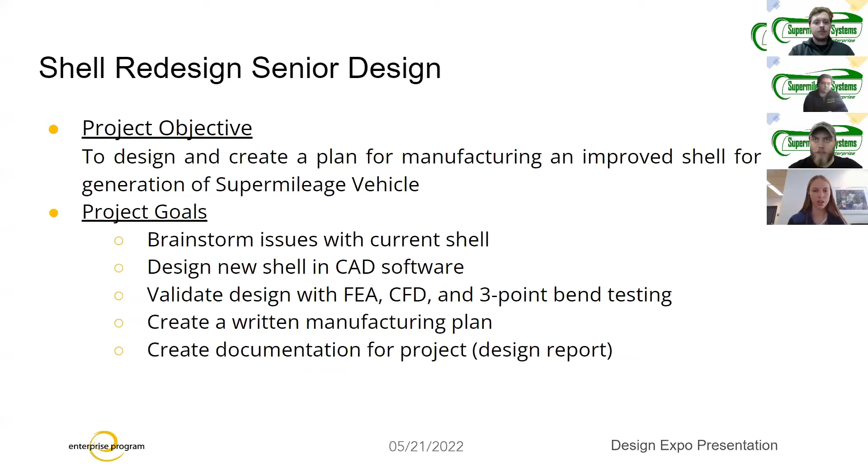We also plan to validate this with finite element analysis, computational fluid dynamics, and physical material testing, as well as create a written manufacturing plan and documentation for the project, mainly a design report.

We have some team-defined requirements for this. The new shell needs to be more lightweight than the existing shell and also have an improved aerodynamic profile. It needs to fit a 5'6" tall driver, have better seams on joined shell pieces, have a more horizontal driver position, and have better testing done, mainly FEA on the floor pan of the car, to ensure minimal deflection.

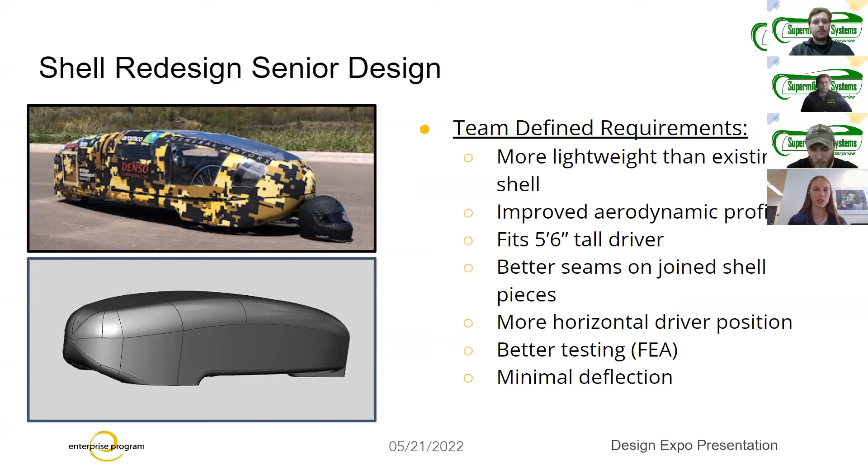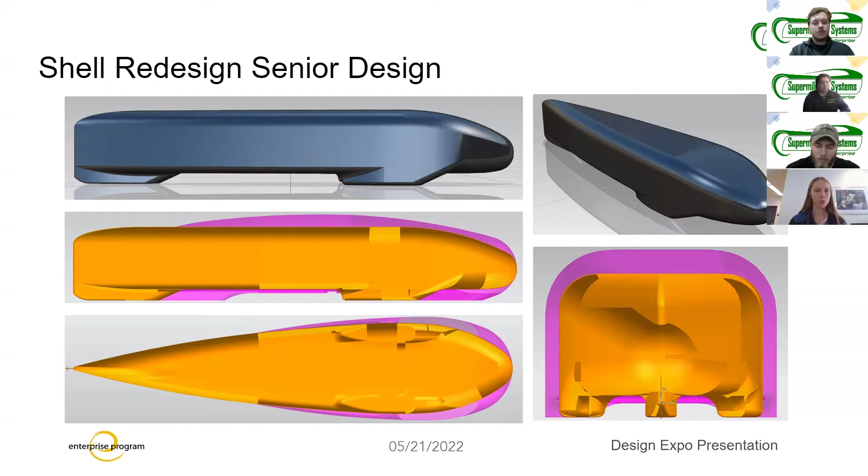This is a comparison of the new shell's CAD to the old shell. The new shell is in orange and the old shell is in pink. As you can see, the new shell is longer, but it also has a significant reduction in frontal area, which is much better for aerodynamics.

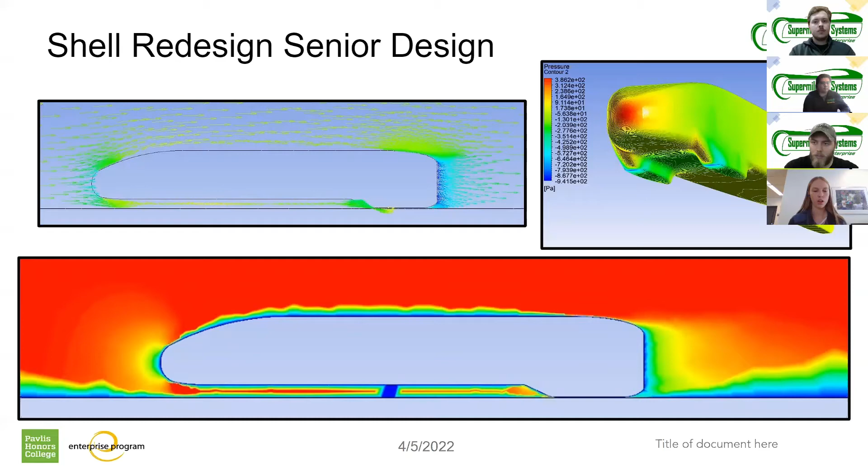With this CAD, we performed computational fluid dynamic simulations to see how the velocity of air around the car acts and where we have differences in pressure. Overall, we have very little eddy currents at the rear of the car, and we also have pretty consistent low pressure around the shell, which leads to a coefficient of 0.2 for the shell, very similar to the old shell.

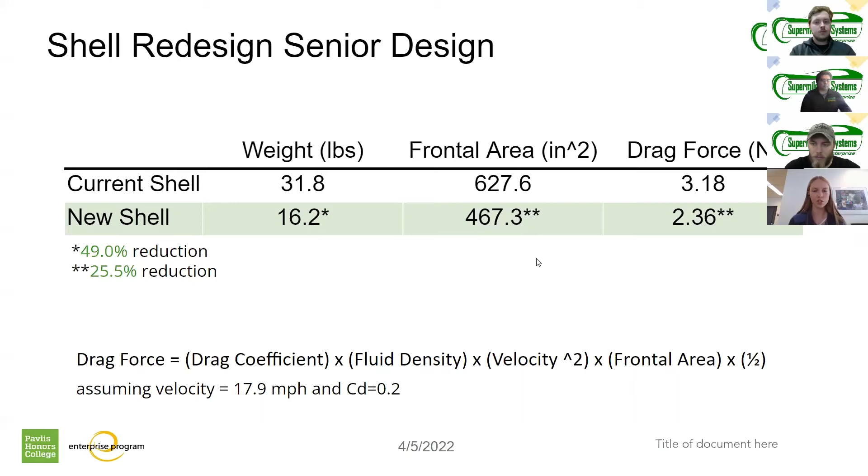Overall, the new shell weight is about a 49% reduction, which is a very optimistic measurement as it doesn't take into account some mounting brackets or our windshield. We also reduced the frontal area by 25.5%. So even though our coefficient of drag does not change much, the frontal area reduction does result in a much lower drag force.

For the rest of the semester, this is the second semester senior design, so we'll be done after this. We need to finish up FEA on the floor pan, complete a manufacturing plan so the team knows what to do after we graduate, and finish up our final documentation.

Hi, I'm Jack Block, and I'm a member of the Steering and Driver Control Redesign Senior Design Project, where our main goal is to design a steering system for the up-and-coming shell, which reduces weight from our current steering system and also improves ergonomics.

Some constraints that we have are that our steering system must be capable of turning within a certain radius. The brake system must be able to stop the vehicle within a certain distance, and it must fit within the new, longer, and slightly narrower shell design.

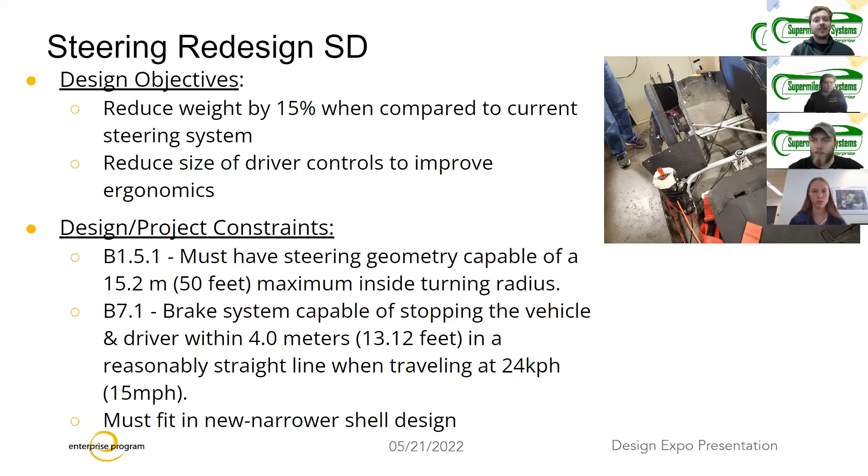For the driver controls, as I said earlier, there's a focus on ergonomics. We're including a burn propter and electronic throttle integration to allow for less successful methods attempted in the past to have the tools to be implemented and integrated more successfully in the future.

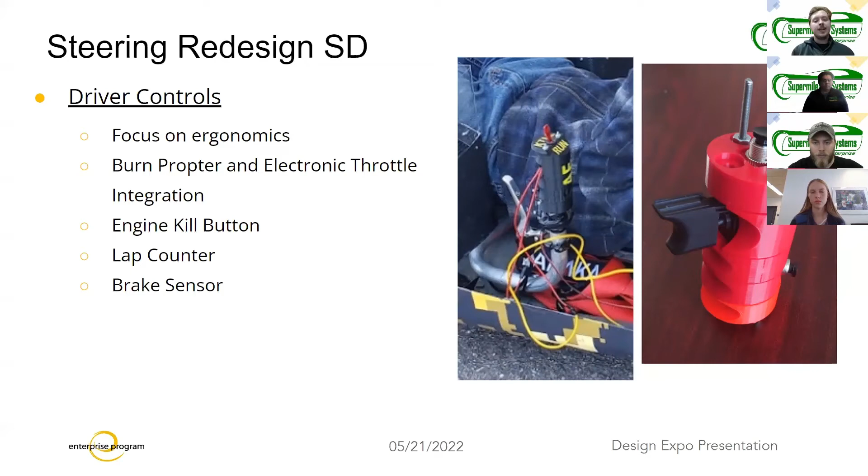We're also integrating an engine kill button to make it easier for the driver to stop the engine, a lap counter, as well as a brake sensor.

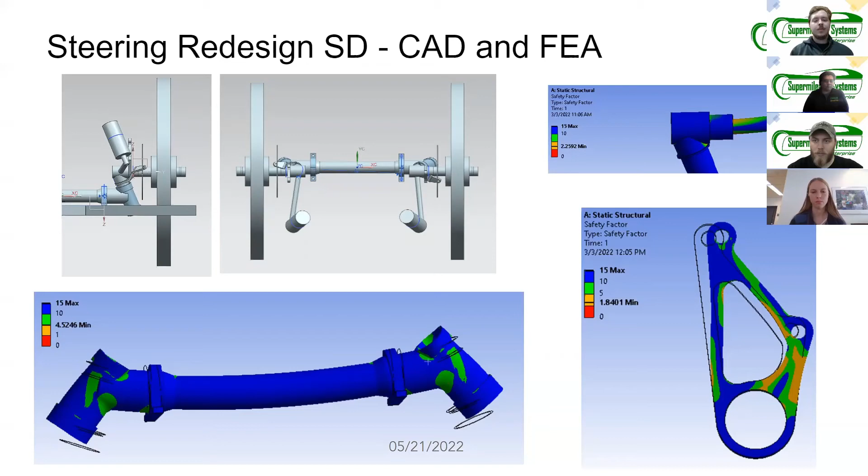Within the slide, you can see the design for our steering system, along with some finite element analysis for how the components would withstand loads. You can see from the finite element analysis that each component has a factor of safety of over 1. And you can also see that our driver interacts with the steering system through a direct connection to the wheel axle.

Here is our current update for the design. You can see that the vehicle mounts, the vehicle axle, and the kingpins are all welded together. In the future, we just need to weld the brake mounts and create the tie rod.

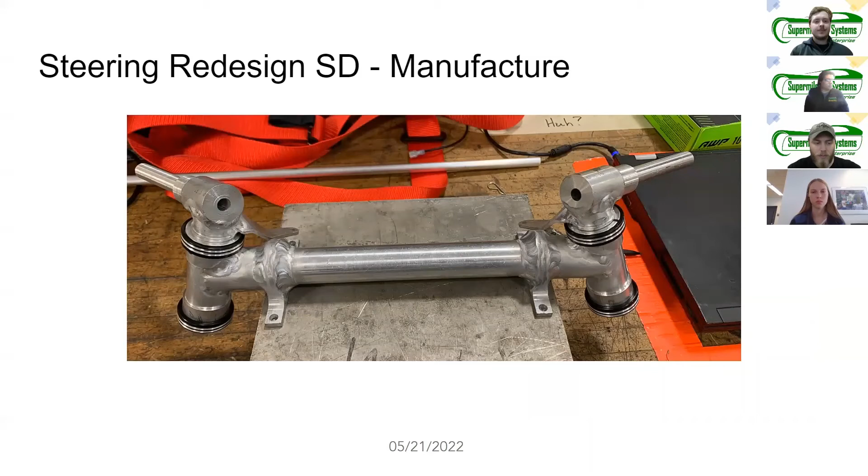Going forward, we need to assemble a test vehicle to ensure that the turning radius and the brakes are functional. We also need to validate those requirements. We need to weld the steer arm and tie rod tabs to the assembly, as I said earlier, and integrate the braking components.

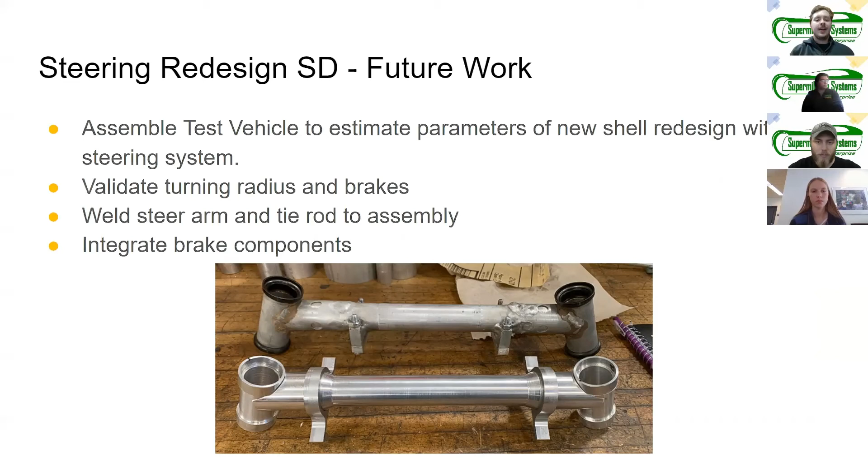For the rear subframe senior design, we are looking to design and manufacture a rear subframe assembly to mount the engine, drivetrain, and rear wheel within the vehicle designed by the new Shell Redesign senior design. Our drivetrain system is to connect the engine to the rear wheel.

Some of our goals include brainstorming different drivetrain options, creating CAD of those different options, validating each option with FEA and fatigue analysis, and creating a bill of materials and a manufacturing plan for future manufacturing.

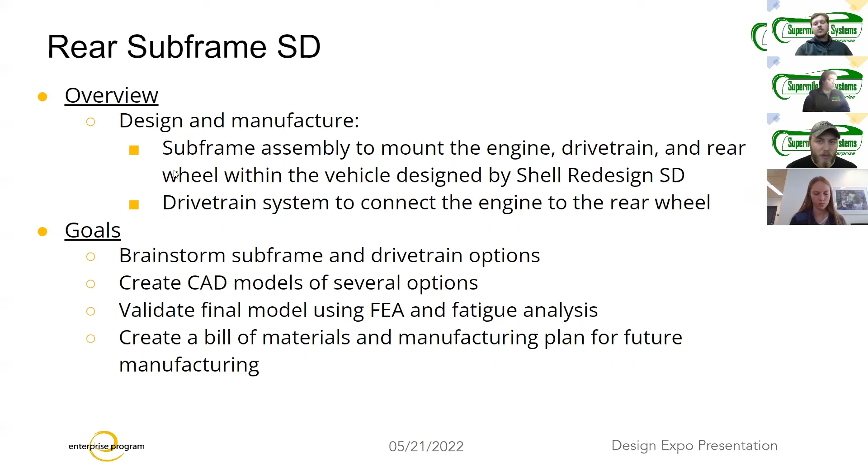Some of our design objectives are that components should fit within the new shell, as well as use lightweight materials for those different components, and every component should be easily removable, as well as the whole assembly should be very easily removable from the car, to make manufacturing or modification easier on the actual car.

Different drivetrain options that we've looked at are a single chain and sprocket system, like the one that we currently use, a jack shaft that uses 2 systems of chain and sprockets, and then a solid drive shaft and bevel gears.

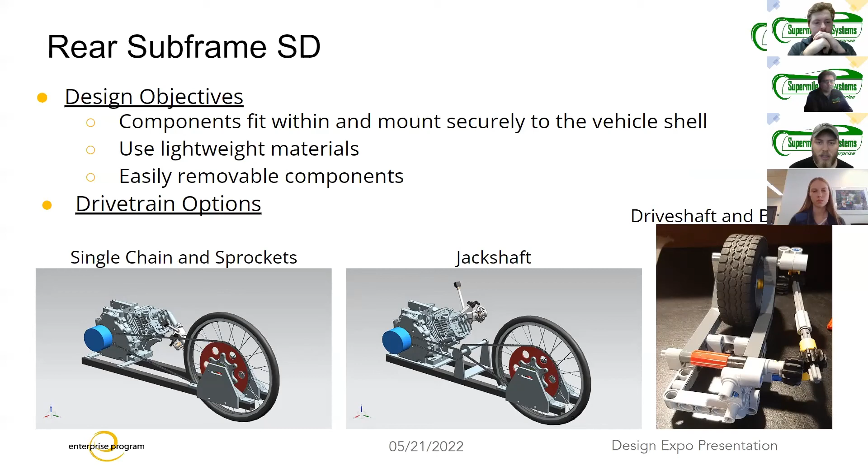The option that we picked is a double chain and sprocket with a jack shaft in between. The engine is centered in the vehicle to maintain weight steadiness and not create an offset. Two sets of chains transfer the force to the rear wheel with a jack shaft in between, in order to have the chain system and the rear wheel also in line with the engine. This would make the intake come from outside the vehicle instead of inside if the engine were to be offset.

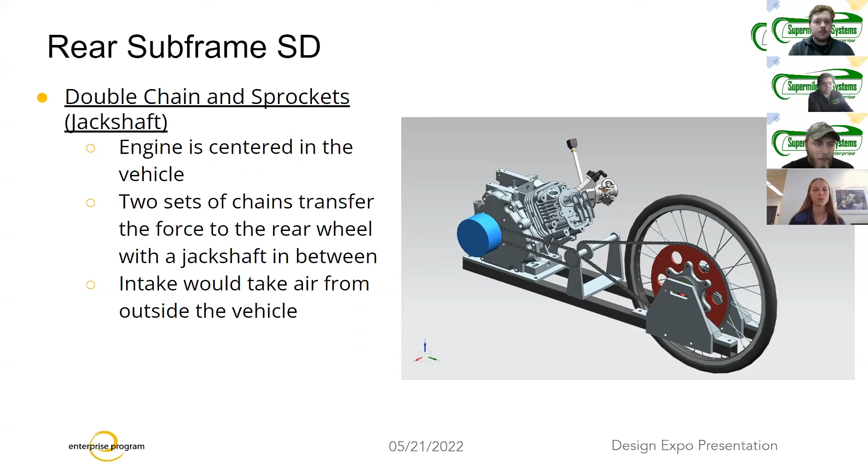Some future work that we have is the FEA analysis to simulate the forces that are commonly exerted on all components and testing the factors of safety with each design option. Also, we need to complete a manufacturing process and a bill of materials in order to know what we have to make and manufacture next semester. Thank you very much for watching.